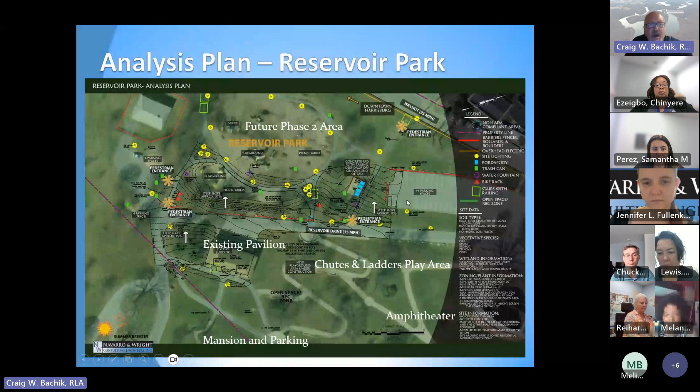The new chutes and ladders playground area has been added. The existing pavilion and Reservoir Drive, which is our primary area of focus, and an existing parking area of 44 spaces. We have prepared two options for consideration by the public and had an open house meeting and picnic at Reservoir Park on Saturday, the 22nd of July.

And out of that, there was a lot of good feedback, a lot of good interaction with folks. Basically, a summary of those comments we received as part of that meeting was that there were divided comments relative to whether we should save or demolish the existing pavilion. At the end of the day, I think it was determined that there's enough historic elements to that, the pavilion's in good enough shape, and there were certainly a lot of community-based fond memories of family events and so forth that happened there, that it's something people felt was worth saving.

People really liked the idea of the water park, the splash pads, and thought it should be enlarged. The two options were that if we save the building, the area might be a little bit smaller. But people said if you're going to save the pavilion, we think we should enlarge that splash pad area as well. There was a need for additional restrooms, more shade areas, and some swings and play apparatus needed for some of the smaller children.

The chutes and ladders is geared towards a slightly older age group for children, so some parents and participants who were there felt there was a need, and we agree there was a need for apparatus for smaller kids. Needed some handicap parking at the pavilion - the existing handicap spaces are further away at the existing lot. And there was a need for more drinking fountains, trash cans, swings for adults and kids, and then park security and lighting. Some of these, as you'll see when we go into the other parks, are relatively consistent comments being made through each of the four parks.

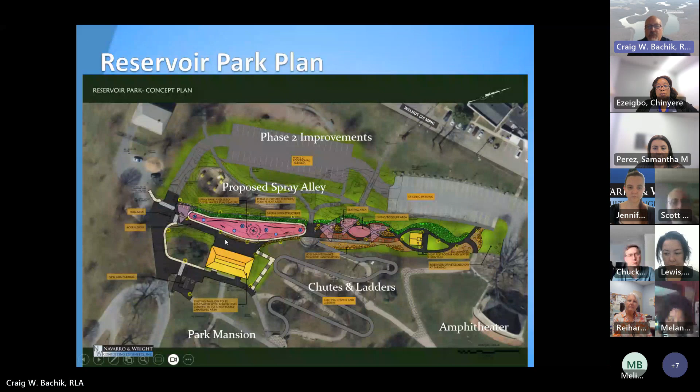The goal with the existing pavilion is to look at converting the lower area, which is currently storage, into a combination of storage for facilities purposes and changing areas and restrooms to serve the splash pad area.

The splash pad is here in the pinkish hue, with identified blue bubbling areas adjacent to that. To the immediate north, or upper edge of that, is the green infrastructure elements, so that we can handle stormwater and deal with some of the functional elements related to the site design.

When we talk about splash pads, we're looking at highly interactive, highly active play areas for children. It'd be a poured in place surface. We're looking at highly interactive space for the kids and families to enjoy as part of that splash pad experience and spray alley experience, if you will.

The second half of Reservoir is that lower section where we're adjacent to Chutes and Ladders. To the left here is the splash pad area, and we have a number of seating elements. We're looking at a walkway that meanders through there. The yellow dots you see here are light fixtures.

For at night, we're looking at a new restroom facility in this area to serve not just the splash pad area and Chutes and Ladders, but also the amphitheater. Looking at new picnic tables, overhead shade structures, and that green infrastructure, the rain gardens and bioswales.

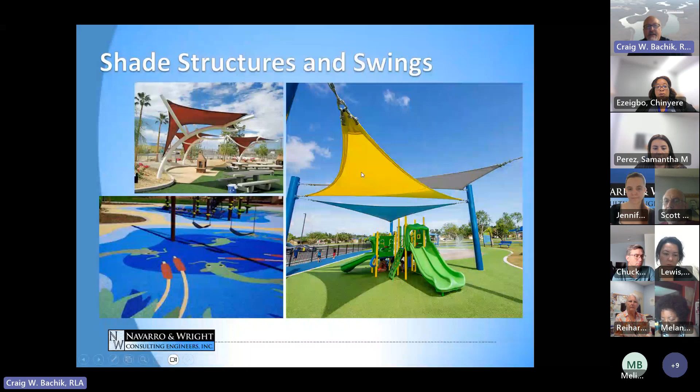We're looking at play structures that are going to be on a play surface that'll be poured in place. We're looking at adding the swings, overhead shade structures to those areas to address some of the comments relative to shade. We're looking at amenities that include new restrooms.

New restroom areas, handicap accessible picnic pavilion tables, drinking fountains like those off to the left here, and then solar powered light fixtures along the walking trails to allow for increased safety and security at night.

We're also looking at cameras, a solar powered camera system to help facilitate some of those security issues and concerns that people have had. So for Reservoir Park, again, very quick overview.

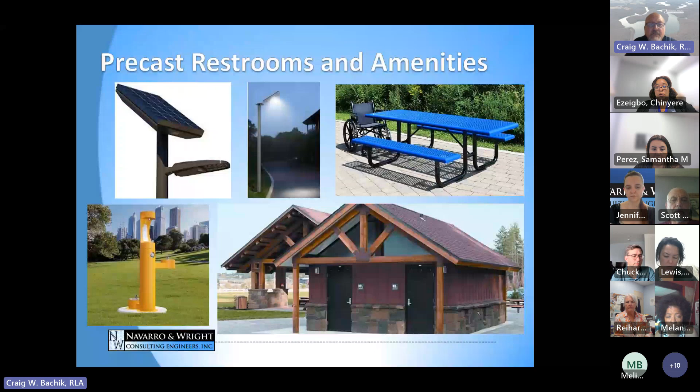New restrooms, new drinking fountains, stormwater improvements, splash pad area and the spray alley, and then a completely renovated and restored picnic pavilion with storage facilities underneath for maintenance purposes from this access drive, and restroom and changing areas to serve the splash pad area.

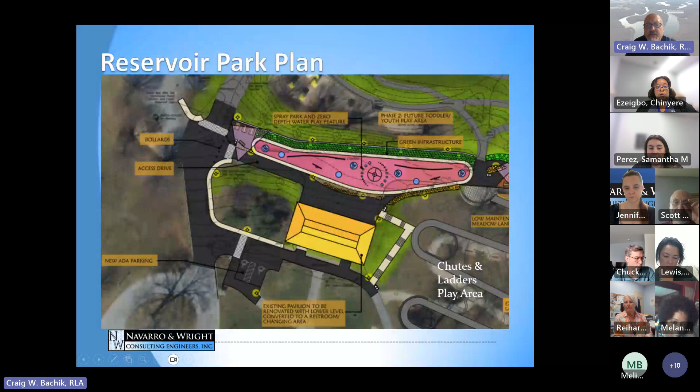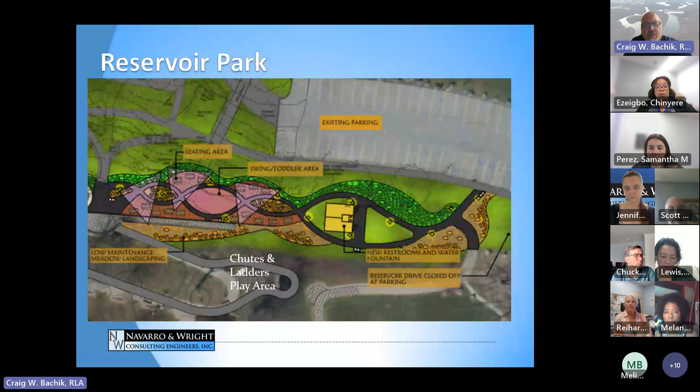So in a very brief summary, that's the status of Reservoir. We're in the process of continuing to develop construction documents for that, and still soliciting and fine-tuning comments that we're receiving from the public. And with all these parks, we'll be moving into the next steps, which will include detailed selection of play equipment.

So moving on to 7th and Radnor and Gorgas. This is the overall 7th and Radnor Sports Park that currently exists. Gorgas is located just to the bottom of this sheet on the southern side of Jefferson Street.

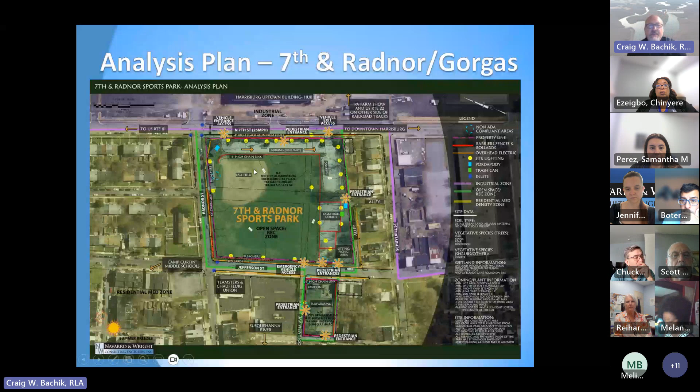Again, we had two concept plans that we presented to the public. We had a Sunday picnic there on the 23rd of July, and we received very good feedback from those residents and participants who came out to provide comments.

Overall, the summary of those comments included: they like the idea of pavilions, they think the only pavilion we have is too small, and they prefer the plan with two pavilions on it.

They feel there's a need for additional restrooms and drinking fountains. And while a complete water park may not be appropriate, a spray pad or spray field for children would be appropriate at this park to cool them down in the summer.

Looking at single rim basketball courts for some of the smaller kids, and new swings.

Folks really like the idea of an art corridor and an art wall, and that really involved combining design one and design two of those two different concepts. We integrated those into the concept document that I'll show you here shortly.

Folks felt there was a definite need for more charging stations near the playground and the courts, so they were accessible throughout the park. That's consistent across all of the parks—charging stations are now an important part of our lives.

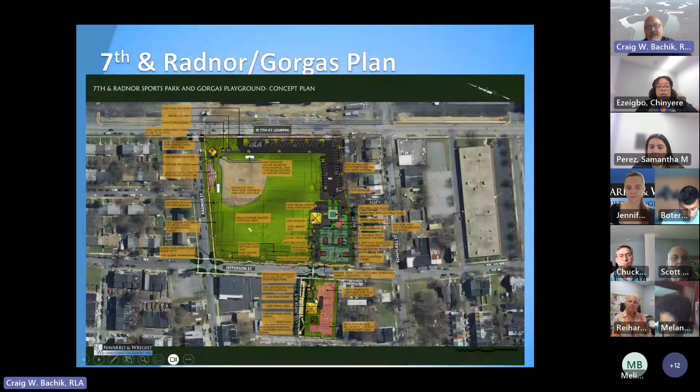We have off of 7th Street access to the existing parking lot. We've shifted that access to provide more room around the ball field area, and are looking at an all new ball field—new concession area, new restrooms, new ADA access.

From the parking area to the fields, new bleachers on both the visiting side and the home side, new shade structures over those bleachers, as well as new netting along Radnor Street to protect the neighbors on the outfield side, the northern side of Radnor, from foul balls that go across.

New pitching pad areas, new pitching mound practice areas, new batting cages in the outfield, and a higher fence around Jefferson Street as an enclosure to the facility to better accommodate the amount of baseball play that happens at this field.

Also all new lighting. You'll see the yellow dots that perforate throughout the design—those are all new light fixtures, new lighting for the sports fields, and new lighting for the plazas and walkway areas.

In the outfield, we're also looking at this being a multi-purpose field where we can incorporate soccer and football, looking at those layouts in the grassed outfield of the baseball area so that we can get multiple uses out of that. Again, I apologize for that flipping.

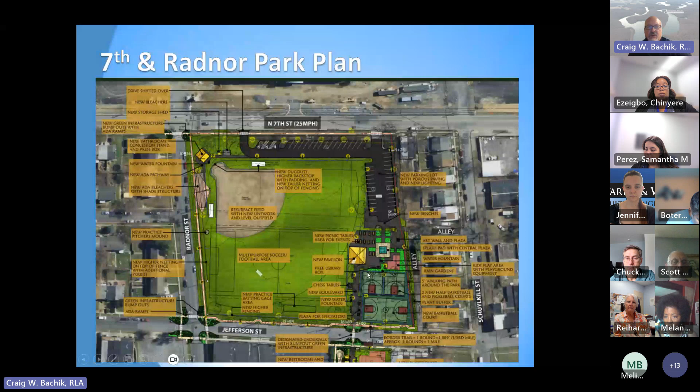What that looks like is a splash pad that would be very interactive for kids to run through, relatively simple when it comes to maintenance, larger pavilion structures, and an art wall that incorporates a variety of different ways to engage public art into the park.

Those chess tables, a free book library, and then all new court facilities with porous paving around the perimeter so that we're sensitive to stormwater and some of the green stormwater infrastructure improvements we want to do in all the parks, but still providing a competitive basketball surface for basketball play.

Those amenities also include new dugouts for the facility, the concession and press box, new drinking fountains, new restrooms, and a new bleacher system. We anticipate those to be aluminum instead of wood, which has rotted over the years, so aluminum would be a better long-term solution, with overhead sun canopies to improve conditions for visitors who are watching the games.

When we look at Gorgas Park, which is on the southern side of Jefferson Street, we look at that pedestrian crossing and the need to do some flashing lights that would allow pedestrians to cross there. Also slow down traffic and do some bump-outs to reduce the distance that people cross from one side of the street to the other.

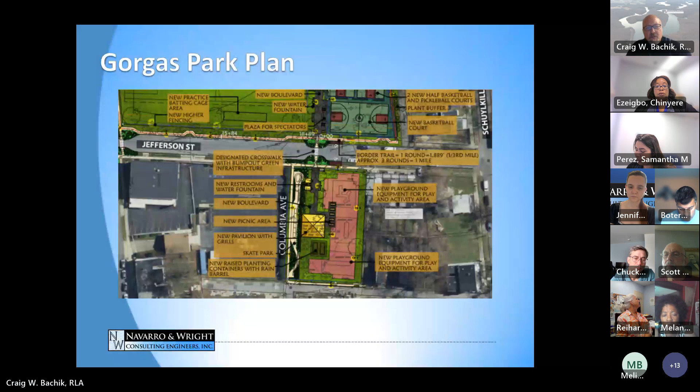Raised planters and container plantings to help support some of the educational activities relative to plant material and gardening associated with the summer programs. So what those amenities start to look like: again, a larger pavilion, handicap accessible tables, new restroom facilities, drinking fountains.

The fourth park we looked at was Wilson. Wilson is nestled in the neighborhood, a very well-attended play area with a highly active summer program. We have Rumson Drive on the left of this sheet, and the intersection with Croyden Road, and really no pedestrian crossings to speak of here.

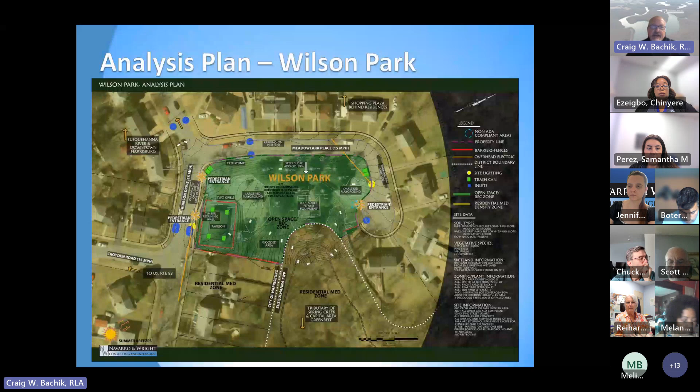Again, we prepared two plans for the community to review and consider, and to give us feedback. Based on those plans, we received a pretty passionate amount of comments relative to a number of things. One of the things that became clear in those two options was that one had a basketball court, the other...

...looked at other amenities, but it became very clear that the community at this point in time does not want to see active basketball come back into the neighborhood. So no basketball court was one of their passionate comments.

Also a need for additional benches, additional seating for parents, and some enclosed areas for some of the play areas as well. We had shown dog parks on the plans.

Feedback from the community was that while they appreciate and feel there is a need for dog parks in the city, they don't necessarily want it in their neighborhood, and are concerned that people would not pick up after their dogs, and that there may be better locations for the dog park.

We had shown volleyball courts. The community did not like the volleyball court option, but did like keeping the fitness and exercise equipment for some of the adults. They had concerns about security, especially at night, and the ability to walk through the park. They liked the idea of restrooms, but felt they should definitely be locked for security reasons at night.

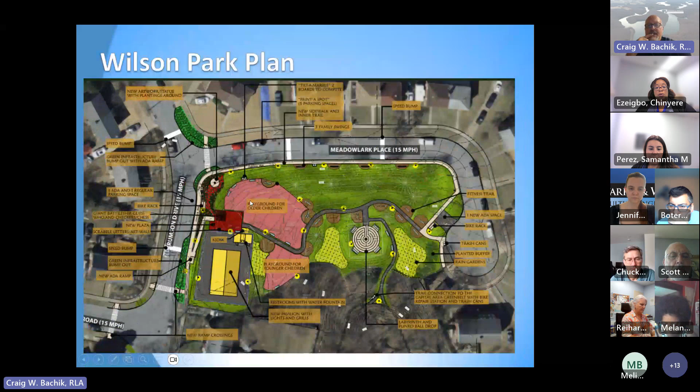There are rain garden elements in the drainage ways, and a labyrinth and plinko ball drop in this pad area, nestled into the trees, with screening to some of the adjoining neighbors. We're also adding this plaza area — sort of an art wall with a variety of other activities, including battleship, guess who, and large checkers or chess play areas, along with other focused amenities in this area.

To give you a feel, because of the tie to the greenbelt, we're looking at providing the ability for folks who need emergency repairs on their bikes to put air in their tires — a bike repair station — along with a larger pavilion to accommodate the new pavilion area at Wilson, and restrooms incorporated into that, along with a drinking fountain.

When we talk about larger chess, this is something that would be used as part of the summer program. The labyrinth and plinko ball have very similar concentric circles that work with one another — plinko ball in the middle, incorporating a walking experience when the plinko ball is not in use.

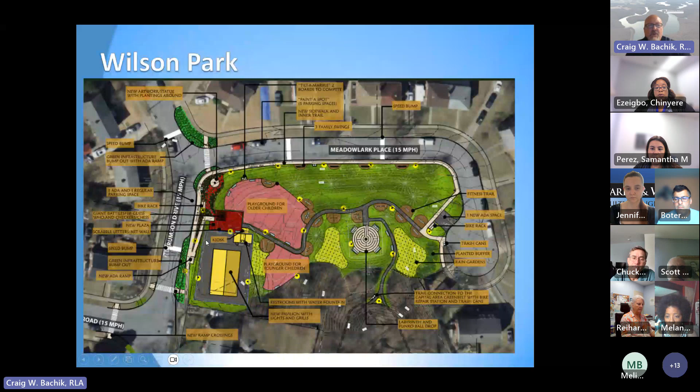So going back to this enlarged area of the park, we see a lot of that stormwater bump-out element being handled along Rumson Drive, and through the park we have a large storm sewer system that runs through there. We're looking at doing improvements to the street that capture some of that first flush flow off the surface of the streets, and improving it before it goes through the park or dumps into the Capital Area Greenbelt.

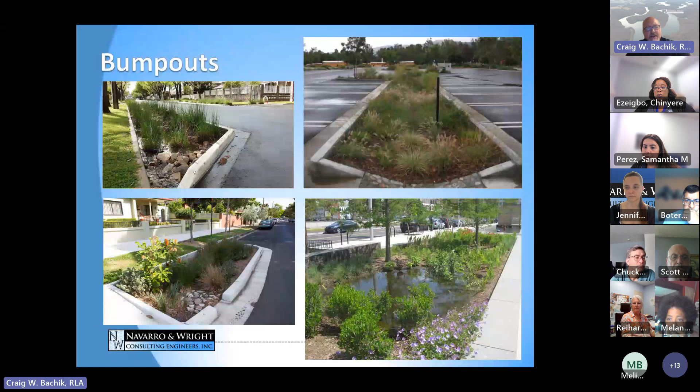That really is a very quick summation of each of the four parks.

The primary next step activities for the design team and for the city is really to continue to address and solicit public comments. This is our second public meeting, if you will. So we're anticipating that as these projects mature, we're going to be refining them in response to people's comments. So it's important that if you have comments, that you let them be known. I think we've tried to listen very closely to each of the areas where we've incorporated or solicited comments previously.

The design team is continuing to work on the detailed plans beyond the colored version of this, including the things needed to put the projects out to bid, the specifications and the various technical reports that support that. We're continuing to work with Capital Region Water on the green stormwater infrastructure details, and the impacts on their system.

We have ongoing coordination with the utility companies as we're looking to provide new services to these facilities. We're looking at finalizing the selection of play equipment and site items over the course of the next several weeks with the city staff. Along with that, we're wrapping up our NPDES permit, which is for erosion and sedimentation control.